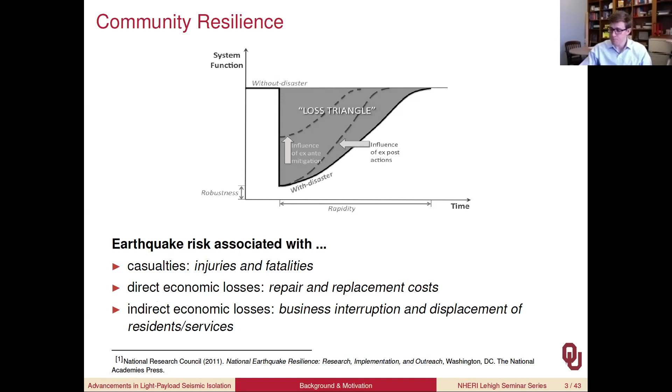These risks are all incorporated into seismic performance criteria to which we design. So depending on the ground motion intensity or design level being considered, the building and its contents need to be performing at a specified level.

Most of the work that I've been looking at is on essential facilities. These are buildings and structures intended for use during post-earthquake recovery, including police and fire stations, hospitals, and emergency communications centers. So we can look, depending on the earthquake intensity, what level of functionality we should achieve.

Collapse prevention is the lowest performance level, and then next comes life safety, and then operational. Under low-level events, we need to be able to maintain fully operational conditions. This is going to aid in the recovery process and ensure that we don't incur some of those losses I previously mentioned. Even under more rare events, these essential facilities need to maintain operation. Otherwise, it's going to hurt the recovery process.

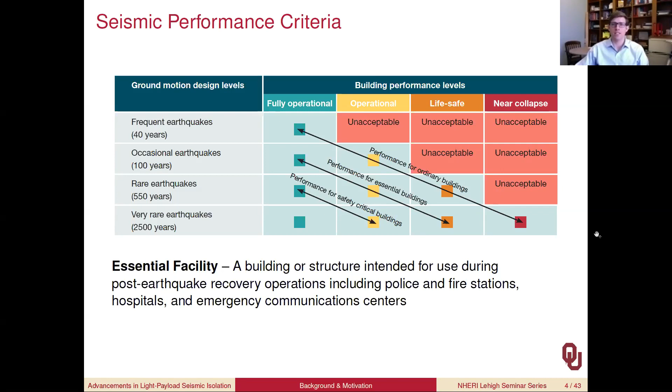A lot of times business disruption is associated with damage or disruption of equipment housed within the essential facilities. So a lot of these facilities have what we're going to call mission critical equipment, for example, some sort of telecommunication device that needs to maintain operation, medical equipment, or just objects that may disrupt egress into a building.

However, a lot of this equipment tends to be sensitive to strong floor motion. For example, a hard drive is typically rated about 30% of a G, and if it should exceed those levels, it's going to go offline and disrupt operations.

Also, with medical equipment that's on wheels or casters, they can slide or roll around, again blocking egress points and causing disruption overall. And then finally, a lot of this equipment tends to be quite slender, so you can experience rocking or overturning of cabinets, which is going to be the focus here, but you can also talk about art in this sense too. So there's going to be some direct losses if you're damaging artwork.

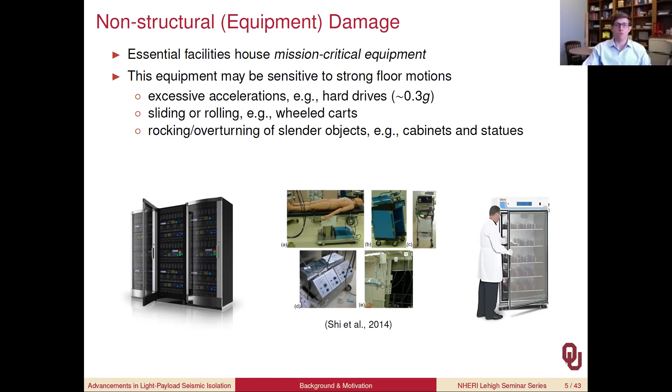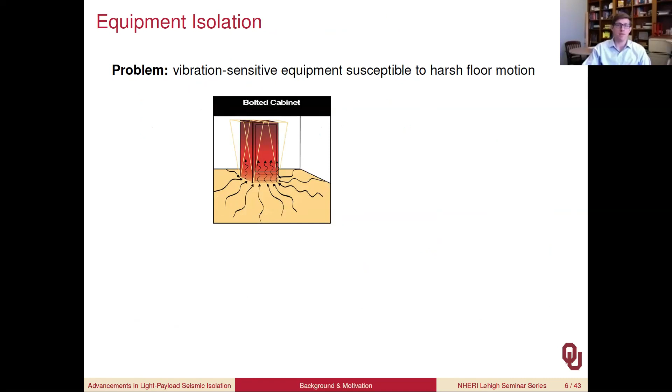So the problem that we face is that this vibration-sensitive equipment is susceptible to harsh floor motion. If we bolt it down to the floor, those floor vibrations are going to be transmitted directly into the equipment, or in this case, this cabinet. That's going to induce large accelerations and potential failures.

So the solution that we've been looking at is base isolation, here actually isolating individual contents of the building or multiple pieces of equipment, as we'll talk about later. The basic premise, like seismic isolation for buildings, is to detune the equipment from the disturbance using some sort of device. Here, the device we'll be looking at is rolling type isolation systems. However, for this sort of payload, there are many devices out there.

In doing this, we're going to reduce the acceleration sustained by this sensitive equipment and hopefully maintain its operation during and following the earthquake. So we're going to eliminate that business interruption following the event and aid in the recovery process.

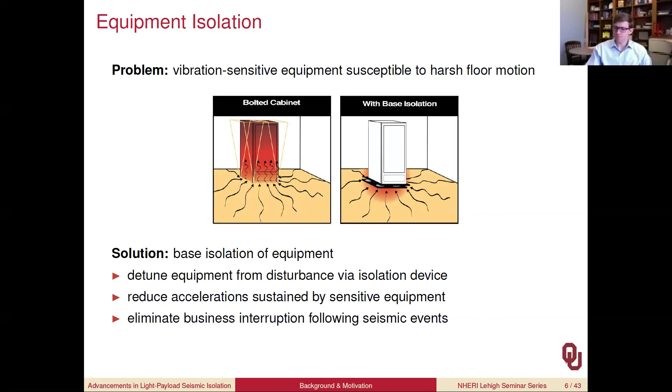Again, the type of isolation that I'm primarily interested in is what's called rolling type seismic isolation. To give you an overview, there's some top frame or platform on which the equipment would rest. Then you have a bottom frame that's resting on the floor, receiving the excitation. Located within these frames are bearings.

A rolling bearing is comprised of a steel ball interposed between a concave-up bowl and a concave-down bowl on the top surface. Being that they're concave, when you experience a lateral translation, that in turn induces a vertical motion, so a change of potential energy that gives you this gravitational recentering force.

So a lot of times you'll hear these called rolling pendulum isolation systems, the fact that the mass ends up not coming into play in terms of the frequency, because the gravitational restoring forces are mass proportional as well.

These systems are quite simple to fabricate. Again, you just have the two dishes and a steel ball. They're easily extendable to multiple cabinets. At a typical facility, you're not necessarily going to have one piece of equipment standing on the floor that needs to be isolated. You may have multiple cabinets or racks that need to be isolated, so they're easily extendable to, in this case, up to about 8 or 10, just by chaining them out in such a fashion.

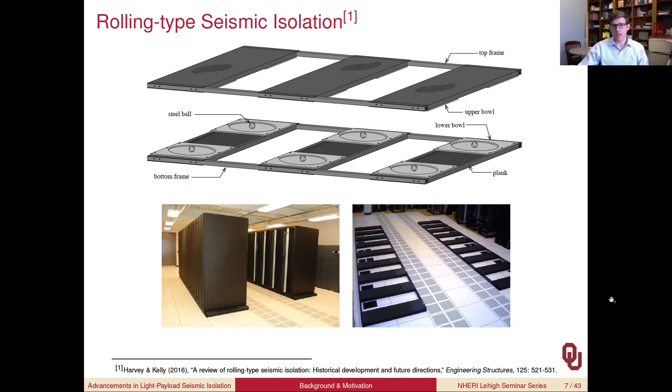In the broad field of seismic isolation, we're looking here at light payload isolation. These are masses on the order of 10 kilonewtons, so single racks or server cabinets, or even an entire floor within a building—one bay where you can isolate a raised floor using bearings placed around it. Here you're protecting an even larger mass, which I'll discuss further later.

Moving up the spectrum, we get into moderate payloads, such as recent work looking at residential homes being isolated—around 100 kilonewtons—all the way up into heavy payloads like multi-story buildings or bridges. The focus here is on rolling isolation, which is affordable and easy to implement for light payloads. Applying these systems to heavier payloads is questionable due to the steel ball, which creates a stress concentration that under large loads can cause durability issues.

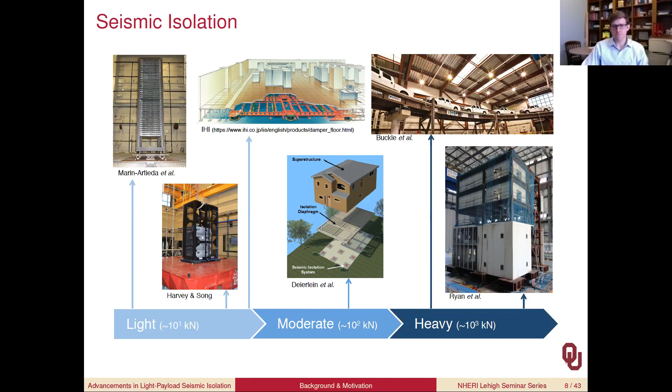To kick it off, I want to share results from experimental tests recently conducted at the University of Alabama, where we tried to see how well these systems performed under operating conditions. We looked at real network cabinets, about 2 feet wide, 4 feet deep, and 6 feet tall, with a total mass for a single cabinet of 7 kilonewtons—again on the lighter side.

These cabinets were loaded down such that the mass was representative of one in service. You have a center of mass located above the wheels, but also front of center, producing an eccentricity that will come into play in terms of the response.

The particular rolling pendulum bearings we're using have a nominal displacement capacity of about 18 centimeters. If the ball were to displace one full radius in the bottom dish and one full radius in the top dish, you'd be able to displace up to 18 centimeters before hitting a rigid lip that constitutes an impact, which is critical for these systems.

Over the remaining portion inside that lip, these are designed to be conical in shape, with a 1-to-10 slope. Being a pendulum-type mechanism, the restoring force is related to the weight mg times the slope of the dish. By constraining the slope to 1-to-10, we're effectively constraining the sustained accelerations to 1/10 of a g. This is a very common design for this sort of system.

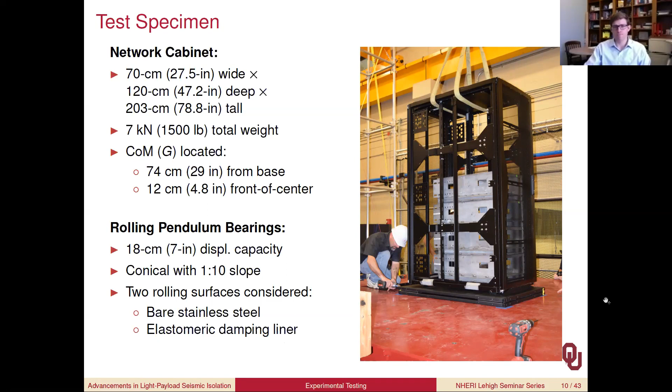Here's the setup we used at the University of Alabama: a uniaxial shake table, with excitation in this direction. We had an array of sensors to measure the table's motion, the isolation platform's motion, and the cabinet's motion. We had an LVDT and a uniaxial accelerometer attached to the table to capture the ground's motion.

At the base of the cabinet, just above the isolation layer, we had 3 string potentiometers and 2 triaxial accelerometers. The potentiometers were arranged to capture the longitudinal motion across the bearing, as well as the transverse displacement and rotations. The accelerometers were likewise located so we could capture the full motion across the isolation system.

We were also interested in what was happening within the cabinet, so we had an accelerometer at the mid-height of the cabinet, as well as two at the top, and a similar arrangement of potentiometers to capture the drift across the cabinet. Here I'm going to focus primarily on what's happening just above the isolation layer, because we're really interested in understanding the dynamics of the platform itself, not so much the cabinet's dynamics.

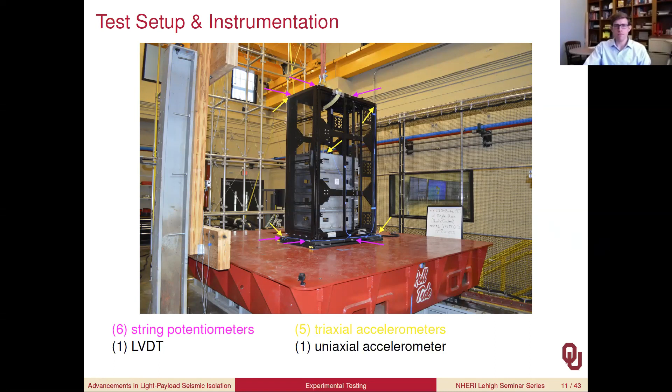The parametric variation was provided by the number of cabinets. We looked at configurations with a single cabinet isolated as well as a ganged configuration. In a data center or facility, they're probably not going to have just a single cabinet that needs to be isolated. Typically you're going to see multiple units. Here we only tested up to 2 cabinets, but you could expect sometimes up to 8 or even 10 of these ganged together.

The orientation: we looked at side to side, shaking through the side of this cabinet, as well as front to back. In the side-to-side orientation, because there is a mass eccentricity, we expect to see larger rotations. Also, this cabinet is quite slender in the side-to-side orientation, which we'll see come through in the data.

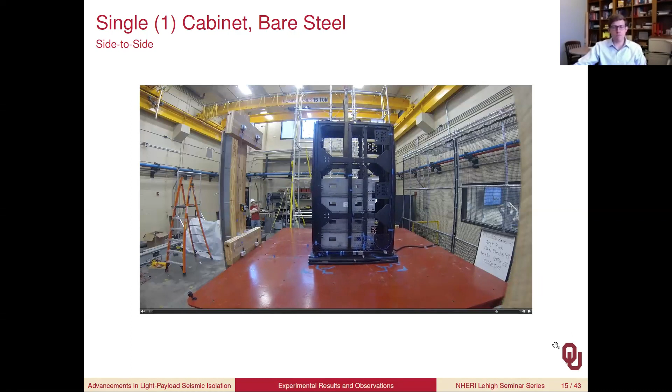A few things to note: because of the eccentricity, we're seeing quite a bit of rotation within the cabinet, and even though we're applying a uniaxial motion, we're still getting rotations. Also, you can see a little bit of rocking within the cabinet out of plane here. And finally, there could have been some audible clicking sound - that was actually the ball impacting with the edges or the lips of the dish.

If we look at the results from the sensors, we have the longitudinal displacement across the isolation layer, the longitudinal acceleration, the total acceleration just above the isolation layer, as well as the rotations across the isolation layer. Here, longitudinal displacements are on the order of about 17 centimeters, and recall that these systems had a capacity of 18, so we're just about reaching their capacities.

In terms of the longitudinal acceleration, you can see a higher frequency content going on there, which is related to the rocking motion within the cabinet. This is superimposed on what's effectively a square wave due to the conical shape. Finally, note here that we had quite large rotations, up to about 8 degrees, resulting from that eccentricity.

In addition to the side-to-side test, we also conducted tests in the front-to-back direction. In this case, the rotations were a little bit smaller. However, even though we don't have that mass eccentricity, imperfections in the system still produce rotations, so we really can't get away with using uniaxial models in this case. Those rotations are smaller though, so a lot more of the energy is being diverted into the longitudinal motion.

So we're seeing displacements in excess of the capacity, and as a result you can see distinct spikes in the acceleration where you have impacts. Note also here, we're not seeing the high frequency content in the accelerations. This is because, in the front-to-back direction, the cabinet's a lot less slender, so we're not getting that rocking effect.

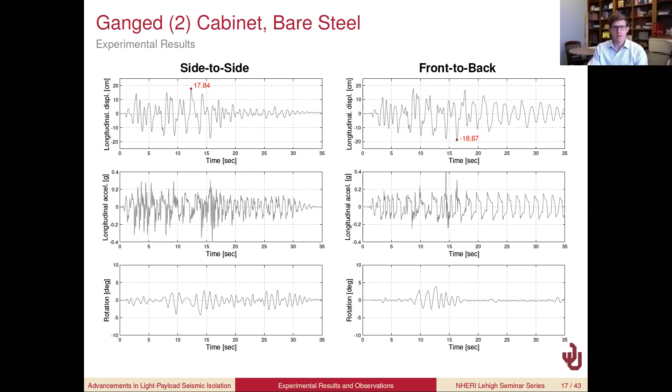Just a few observations I've highlighted here. Significant rotations developed, and in some cases this led to premature impacts. So just because our displacements weren't necessarily exceeding the 18 centimeters at the centroid of the cabinet, because of the rotations at the extremities, we're actually exceeding the bearing capacities. This says the rotational coupling cannot be ignored.

Another observation is that at this DBE level event, the displacement demands exceeded the capacity for the bare steel rolling bearings. This motivates the need to either increase the capacity of these systems, moving up from that 18 centimeters, or increasing the damping. The latter approach, increasing the damping, is what we want to talk about now. So here, same setup, but instead of using the bare steel dishes, we're looking at the elastomeric lined dishes.

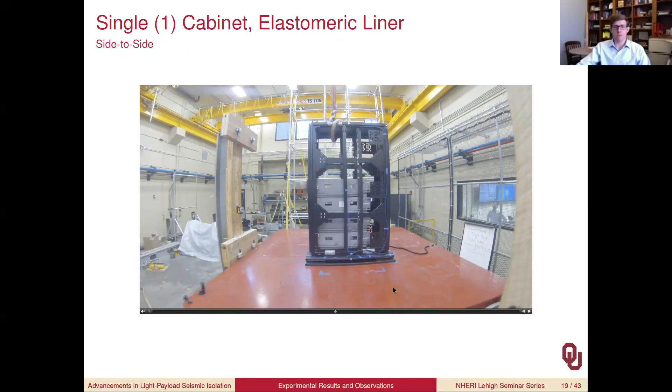Again, you can see some rocking motion in the slender direction. However, the rotations are considerably smaller, and what we can see from the time histories is that the displacements are smaller as well. So here only now 16 centimeters and 18 centimeters in the side-to-side and front-to-back directions. Again, we can see the higher frequency content from the rocking. However, the rotations are substantially smaller, and we're not seeing the impacts that we were for the other case. This tells us that supplemental damping using these rubber-coated rolling surfaces is capable of improving the performance, as we'd expect. If we increase the damping, we're going to decrease our displacements and in turn improve performance.

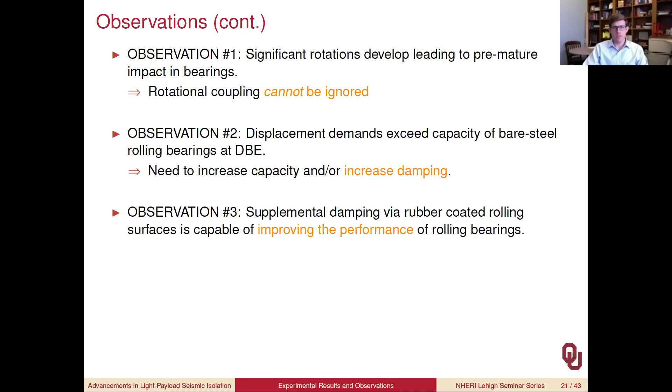Now I want to shift gears a little bit and go to some of the mathematical modeling that we've been doing of these systems. So we've seen some observations in the lab, but now we want to be able to try to capture that with predictive models, physics-based predictive models.

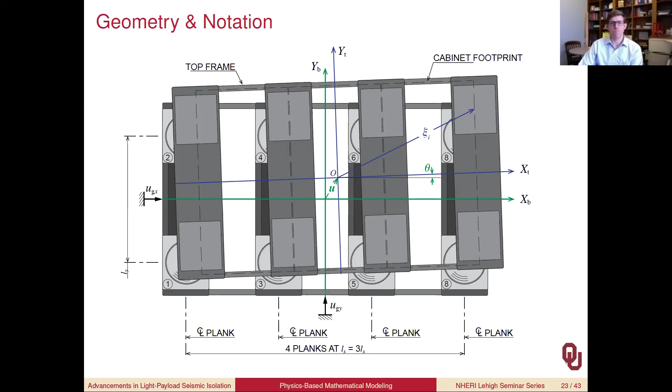The formulation we followed was using an energy-based approach, Lagrange's equation, so we needed to formulate the kinetic energy and the potential energy. Here, the kinetic energy includes the rotational terms. For potential energy, because this is a gravitational system, the potential energy is mainly coming from the change in gravitational potential energy—mg, the weight of the object, times the interpolated height at the center of mass of the cabinet.

A critical piece of information we've been including in these models is the fact that the balls don't necessarily stay on the center lines. They actually have their own dynamics that need to be modeled. In some of the tests, at the end of the test, we'd actually see that the balls were off-centered or even nearly out of the bowl.

This led us to model them using a rolling without slipping condition. There's a prescription of what the ball's velocity is as dictated by what the upper bowl is doing relative to the lower bowl. This is a classic form of a non-holonomic constraint—constraints on the velocities of our generalized coordinates versus just the generalized coordinates themselves. This means we need to be careful when we apply Lagrange's equation and use the appropriate form, the non-holonomic form of Lagrange's equation.

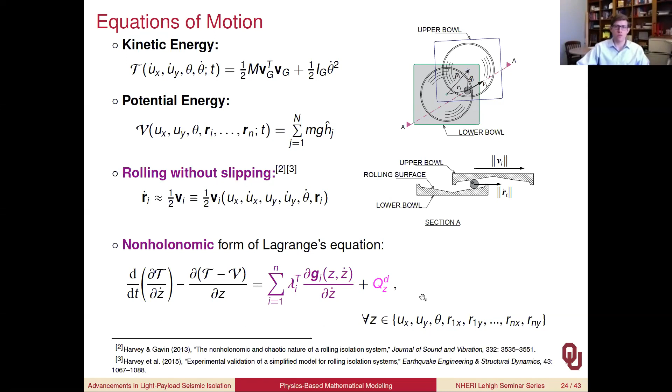The left side here looks very familiar, the right side also looks familiar. However, you need to be careful when applying the constraints. You have a multiplier that's going to enforce those rolling without slipping conditions, but then you need to impose the constraint by looking at the gradient relative to the generalized velocities. If we go through the motions of applying this equation, we get to something that looks quite familiar.

So here are the equations of motion for the platform. You have your mass times acceleration terms, some dissipative terms, where the dissipative forces come from rolling resistance. Then you have gravitational restoring forces related to the weight of the object, the allocation, so this B is allocating masses to each of the bearings, and this is the gradient of the bowl at the ball location. So you have contributions from the lower bowl as well as the upper bowl, and finally on the right-hand side is the disturbance.

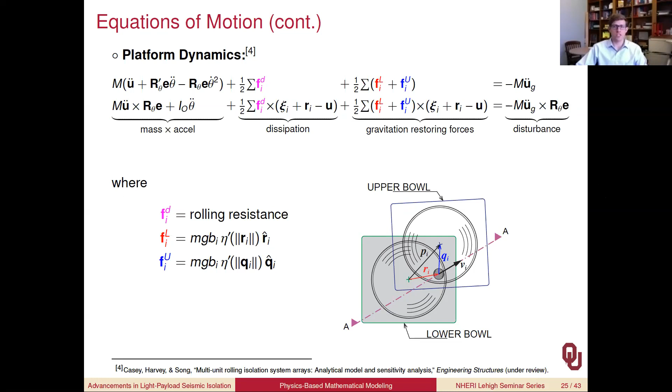So at the end of the day, we end up with equations that look very familiar to us. However, these need to be simulated simultaneously with the ball dynamics. So you end up having 3 equations to express the translations of the platform as well as its rotation, and then 2 more coordinates for the x and y motion of each of the balls.

So now to validate this model, looking at the experimental results, now overlaying with the numerical results here for the bare steel dishes, because it's very lightly damped, we're able to get away with using a viscous damping term. And we see excellent correspondence in all 3 of these. So displacements are nearly perfect, accelerations line up well. We're not capturing that high frequency rocking motion because the model is assuming a rigid mass.

Rotationally, we develop rotations not quite to the same order as we saw experimentally. However, we see an impact here at 8. So I've terminated the simulation at about 8 seconds, and that's due to an impact. You can see a large spike in the acceleration.

One of the critical needs is actually to better model these impacts. So here we're using just a simple sort of Hooke's type impact model, which isn't very representative of how these impacts actually happen. So following the impact, the response is suspect, so we've actually just terminated the simulation at that point.

Similarly, we get good results for the front to back direction. Here the model, because there's no mass eccentricity, doesn't develop any rotations, and we perfectly predict the very first occurrence of impacts, and we're actually able to go a little bit further before the model becomes spurious.

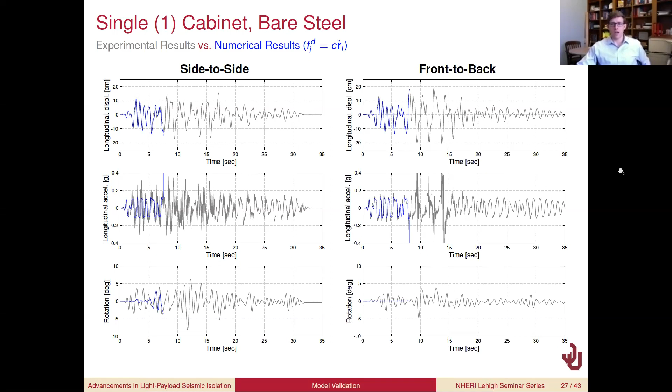Therefore, we feel comfortable in using this model to predict the occurrence of impact. However, subsequent to the impact, sort of all bets are off.

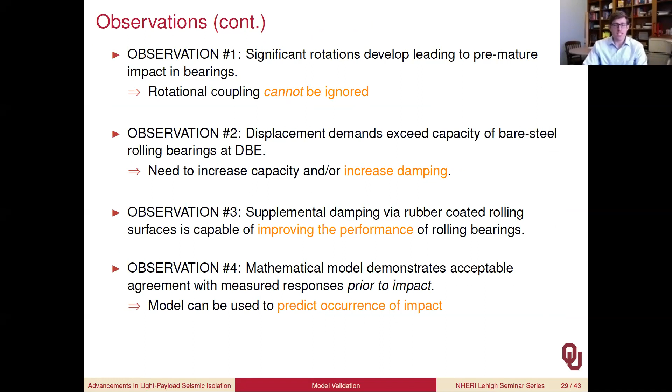So what I didn't show you is the response with the elastomeric liner cases. And that's because we don't currently have a validated model for the rolling resistance. When we coat the dishes, the rolling resistance goes up substantially. No longer are we talking about a lightly damped system. And so that viscous damping model is no longer valid. So a question that remains open is how to actually go about modeling these.

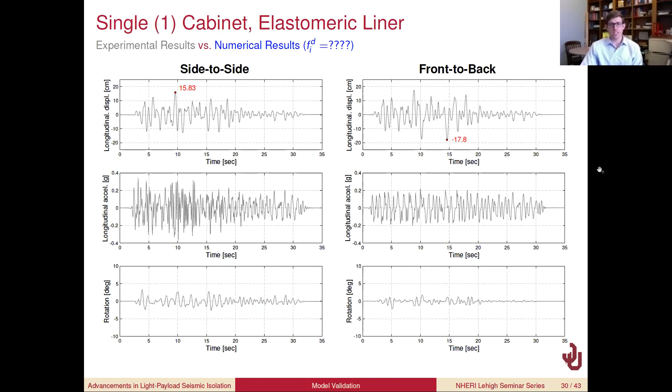And this is a nice lead into some of the ongoing work that we're doing in our group, as well as some of the future work we have planned. So the three items that I want to highlight today are looking at other high-performance rolling isolation solutions, also looking at isolation performance under rare events, so MCE level events, and then finally looking at some of the primary secondary system interactions, that is interactions between the isolation system and the structure that's housing this equipment.

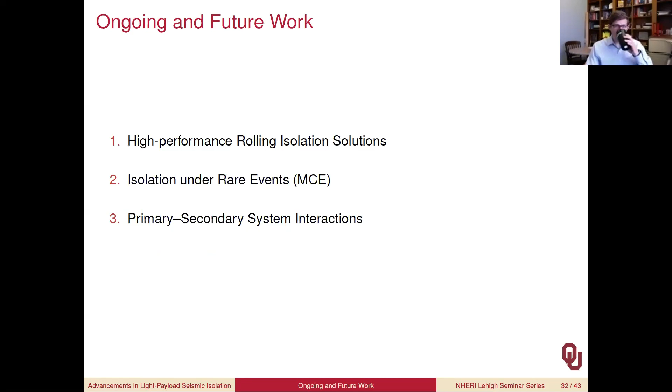So to begin with, talking about high performance rolling isolation, two primary techniques that we've already identified that we've been working on is supplemental damping and increasing capacity. So the objective here is to analyze, assess, and optimize different high performance technologies. With the supplemental damping, we have the benefits of decreased bearing displacement. However, this is at the expense of increased accelerations. The modeling of the rolling resistance becomes quite complicated due to the load and rate dependence of that rolling resistance.

So previously we've done some tests where we tried to characterize what those relationships are and then came up with phenomenological models for those. And this is what we're doing now, trying to actually tailor these for different hardnesses of the liners, as well as different thicknesses, potentially even varying thicknesses.

So again, supplemental damping is going to help us with our displacement across the bearings. Another approach could be to try to increase the capacity of these systems. So the natural inclination would be just to increase the size of all the components, go with twice as big of bowls, twice as big of balls. However, this is cost prohibitive.

These different components are actually increasing disproportionately with size. So we'd like to maintain this compact nature of all the components while still trying to increase the capacity of the system.

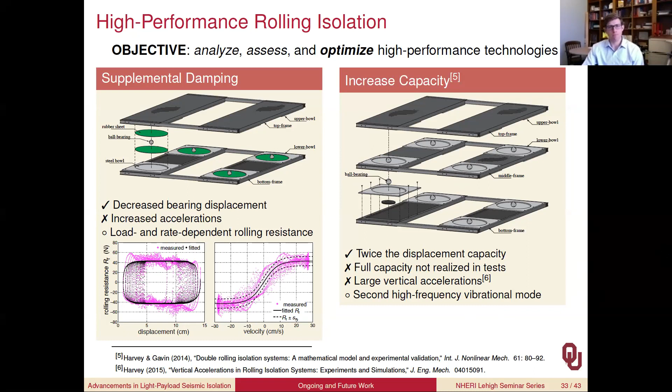Another area of interest that we're working on is isolation under rare events. Again, these essential facilities need to maintain operation at rare or even very rare level events. So how can we optimize geometries of these systems as well as impact mechanisms such that we can ensure a safe level of operation following the earthquake?

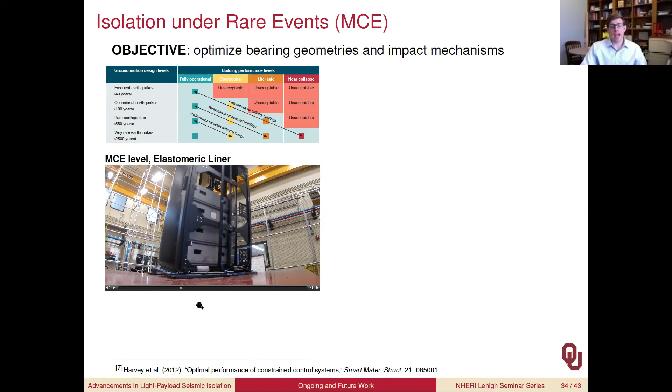So the question becomes, can we ease these impacts in some way such that they're not quite as harsh? Now what we're looking at is trying to benchmark the performance under an MCE level event.

So trying to determine the best possible performance using optimal control. Here the idea is that we're going to optimize an impact force trajectory that's acting at the periphery of these dishes, as well as bearing parameters P over a finite horizon. So here's this integral cost functional, subject to the dynamics of the system as well as passivity constraints.

So we're going to have some sort of inelastic impact that we want to model, and here we're trying to capture what's the best possible impact we can have. Note that this is an open loop solution, so it's not really implementable in real time.

However, this can motivate or guide some of the decisions we make when we go to actually design a mechanism. Instead of assuming a feedback solution, restricting ourselves to a particular form, for example a cubic stiffness, some restraining straps, or maybe a Hertz type impact model, we've now left it open to all possible solutions that fall within the passivity constraint.

In doing this, we're able to benchmark those other solutions we may pursue so we can compare how close to optimal we actually are. Again, we can also look at the trajectories in terms of forces versus displacements, or forces versus velocities, which can then motivate or guide the decision as to what impact mechanism to use.

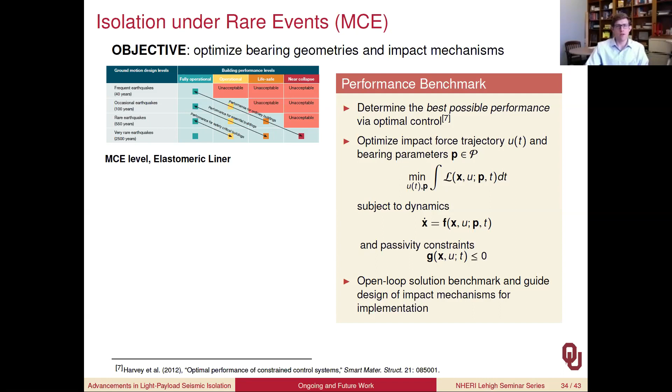The final research area we're moving into is incorporating primary-secondary system interactions, moving up in scale. Instead of isolating a single piece of equipment, we're isolating an entire floor within a building—a single bay on a raised flooring system. This means larger payloads and higher mass ratios, meaning higher isolated masses relative to the structure mass.

It's typical when designing or analyzing these systems to assume everything operates in a one-way fashion: ground motion enters the building, causes floor motion, and we feed that floor motion into an experimental or numerical model to find the system's response. This is valid if you're sufficiently detuned, which we typically are for isolation systems, and your mass ratio is quite small. If we're operating in this range, the decoupling between primary and secondary systems is okay.

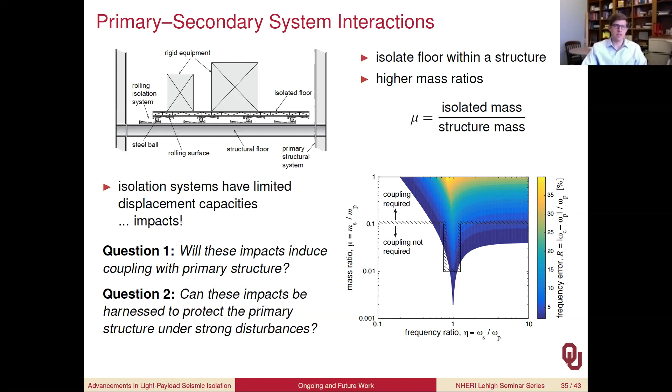However, we shift focus at higher level events. At MCE or very rare events, the utmost concern is life safety and collapse prevention. So maybe we can harness those impacts to reduce the floor level motion, actually trying to reduce the drift within the building.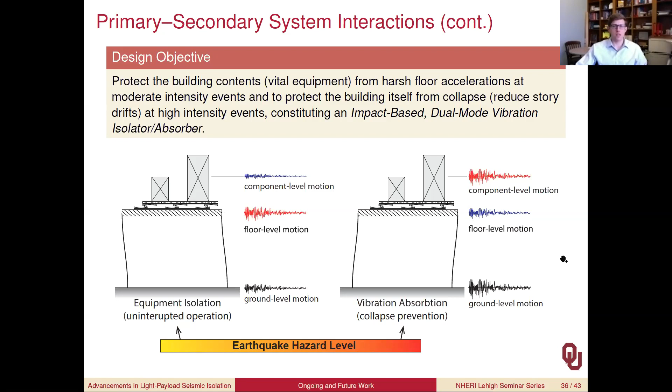I want to show some very preliminary results from the lab here at OU. This is the Fears Structural Engineering Lab, where we have a shake table to demonstrate this concept. This is a 3-story structure with a piece of equipment on the 2nd floor that needs to be protected. We've considered three scenarios: one where it's rigidly locked or fixed to the floor, and two cases where it's isolated—one without impact and one with impact.

The test program uses a monotone function—a single frequency with amplitude swinging up and down. The ground acceleration is gradually stepped up, then swept back down. As a result, we get some acceleration of the isolator—in this case, just the fixed mass—as well as measuring the drift. Using high contrast dots, we're doing vision-based motion detection to measure the structure's response.

For the lock system, we see this is very much a linear system—everything is increasing linearly with the ground motion intensity.

Next, we considered a case where we isolate without impact, decoupling that mass from the floor using a linear bearing. Here you can see the structure oscillating, and due to the isolation, that mass is no longer moving, apparent from the isolator acceleration. We've very much decreased the acceleration sustained by that equipment, protecting it so it can maintain operation.

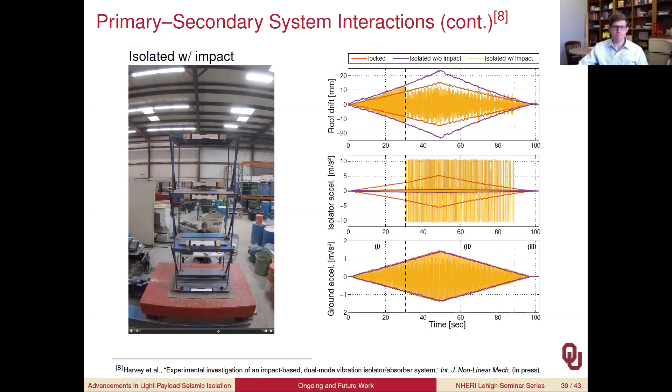So to wrap it up, I hope today's talk gave you some insight into seismic isolation, in particular light payload equipment isolation, as an attractive solution to protect sensitive equipment. In doing this, you could potentially reduce the downtime and business disruption caused by earthquakes, and overall enhance a community's resilience, better being able to respond to earthquakes and not incurring direct and indirect losses.

Some of the results that we showed: we extended physics-based models of these systems for an arbitrary number of isolated cabinets that includes rotational coupling, and we're able to successfully predict the occurrence of impacts with these models.

Some of the future needs that I've noted are high-performance solutions that may be capable of withstanding an MCE level event. So we need better models of what those impacts need to look like, and also what the subsequent response is going to be if we want to predict under extreme events.

Finally, trying to shift focus to a more holistic approach where we consider the building system, instead of just the building and the equipment as two separate pieces. So now we need to actually consider them together and see if there can be some synergy between the two.

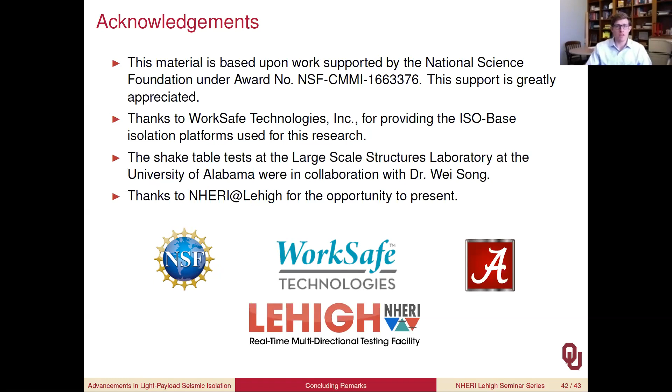Yeah, thanks, Scott. Are there any questions from the audience? And also, Tommy, did anyone send in any questions that Scott could try to address? We don't have any questions in the group chat at this time, but feel free to unmute yourself if you'd like to ask a question to start any discussion. Thank you. Any questions from the audience?

Scott, I had a question. A very interesting talk, by the way. So I had a question regarding the isolation system and displacement. I guess the impact appears to be a criteria that you have to address. Have you tried to look at—and of course this may be influenced by the type of ground motion, near fault versus far field—have you looked at any semi-active control, any other aspects, and maybe see if that could be enhanced? Because damping helps, but it's maybe limited because, as you say, you're increasing your acceleration.

Okay, yeah, so let me maybe go back. Previously we actually looked, using that optimal control technique that I mentioned, trying to see if semi-active control would enhance the performance. Here we're very much trying to go with the passive solution. Some of the challenges potentially with implementing a semi-active technique would be the fact that these are very low profile, so to get something in there that's going to be able to actuate the system may be difficult. And of course, if you go to semi-active or definitely active, you can increase the performance. However, we've really primarily focused on passive solutions.

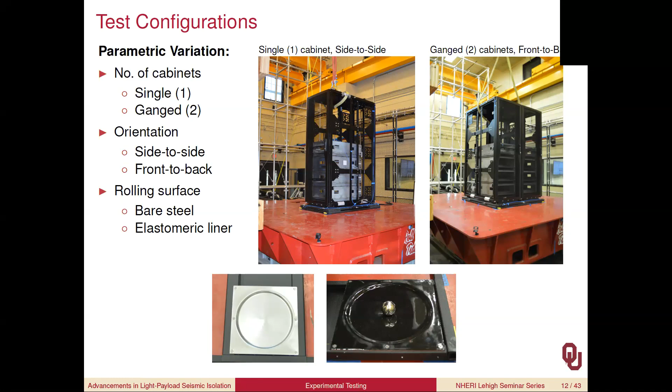Oh, okay. And in those studies you did, I don't recall if you identified the record—was that a natural ground motion, or did you... No, it's just this one here. Oh, I'm sorry. That's probably a spectrum-generated synthetic ground motion. Yeah, so this is a spectrum-compatible ground motion. So Bellcore came up with this to be the desired response spectrum for floor motions, and then this is a synthetic accelerogram generated from that.

Something you'll note here is due to limitations in tables, they've actually filtered away a lot of the lower frequency content of the ground motion. So while the standard says you need to be along this dotted line, the requirement actually only states you need to exceed that at greater than 1 hertz.

The thing I'm curious about in these requirements is the types of frequency content, because you get record-to-record variability for natural records, and in particular I was thinking again about near fault versus far field. Near fault conditions, as you may know, traditional base isolation sometimes has displacement concerns, so I'm wondering in these qualification tests whether that's something that perhaps should be considered, if it's not in the spec.

And then the other thing is there's also another criteria, I guess, IEEE 693. I'm wondering what your thoughts may be about that, or if you've ever considered that.

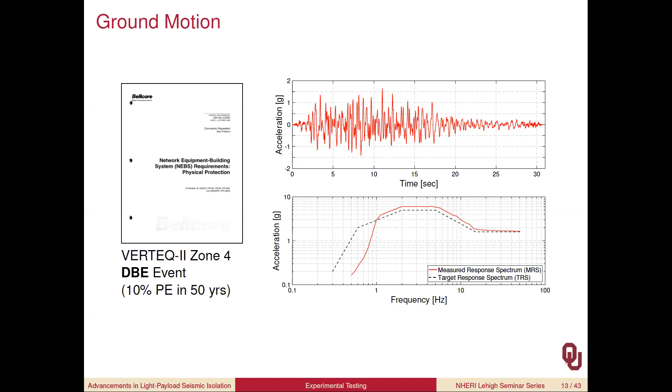I don't want to dominate the discussion, although I have another question I wanted to ask Scott. There's a question in the group chat asking, have you considered any studies on the rubber steel plate bearings? Yeah, so with this light of a payload, maybe if I jump out.

Oh, sorry. So if we go maybe to this, with the light payloads that we're talking about, lead rubber doesn't really scale that well down to that small of scales. So you need very light damping, and it's very hard to get a soft enough bearing.

So we really like using these pendulum systems because they're mass independent. They function under a pendulum mechanism, so the restoring force is mass proportional, as are your inertial forces, so it ends up that the mass falls away. We're able to achieve very light damping with that bare steel, which can be good in terms of acceleration responses, but as we saw, not so good in terms of displacements.

Other sorts of devices, so actually here you can see people have looked at these coiled spring systems for this sort of equipment. When you move up in scale, so if you go to a floor sort of application, then you can start talking about lead rubber bearings potentially.

Scott, I have another question. Go ahead. Sorry, you mentioned vertical acceleration, or at least I saw it in your presentation, and base isolation structures are very stiff vertically, traditional structures. So there may be a vertical component depending on the earthquake characteristics. Have you had an opportunity to look at that yet, or is that something you have maybe in mind for the future? Because I think in this isolation system there's no vertical restraint to try to prevent maybe even uplift, right?

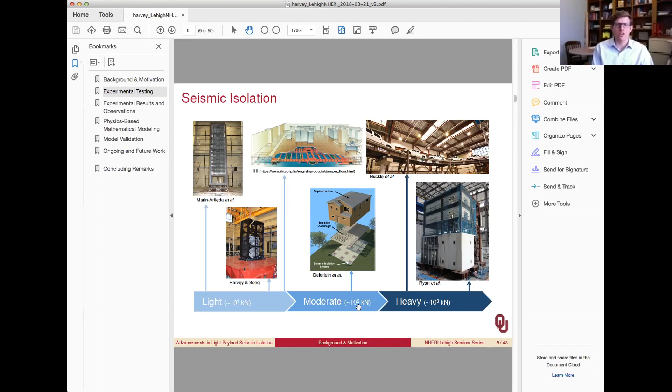Other applications other than data centers that I keep referring to are different telecommunication facilities, potentially some transmission, so electrical transmissions. Another application I'm interested in taking this work potentially is looking at wind loading—should there be some sort of impactive load due to windborne debris, could these actually help in that case as well? So there are definitely other applications, but the primary focus of these systems really is the west coast of the US, Alaska, and then other places across the world that are traditionally known for their seismicity.